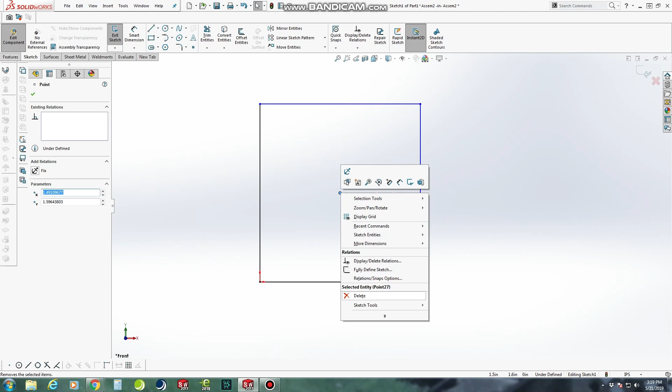Then we'll come in and do basic overall dimensions. Let's do 3 inches tall and 2 inches wide. I'm going with this 2 inches kind of arbitrarily because we have Delrin that we use that is 2 inches by 2 inches, which is basically just a high density plastic, and I think it'll be perfect for this.

Next we're going to put the circle that the rod's going to come through, and we want that to be in the middle. I think what I'll do is add my own construction line horizontal to this, and we can change that size. There we go.

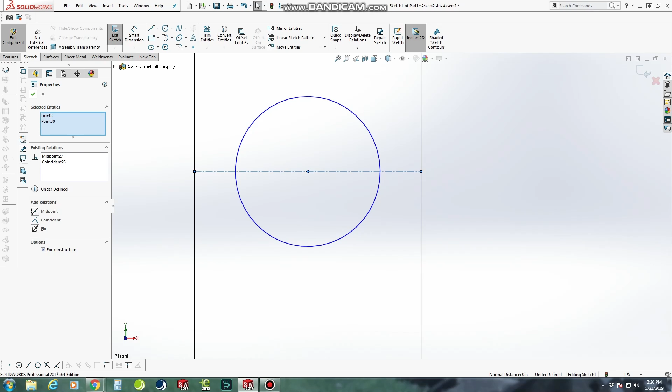And then we're going to hold control and click those and make that a midpoint line. And then let's add a height to that, let's do 1 inch, I think. And then we'll add a dimension to this, 0.625, that's the same size rod that they actually use on the Amazon one.

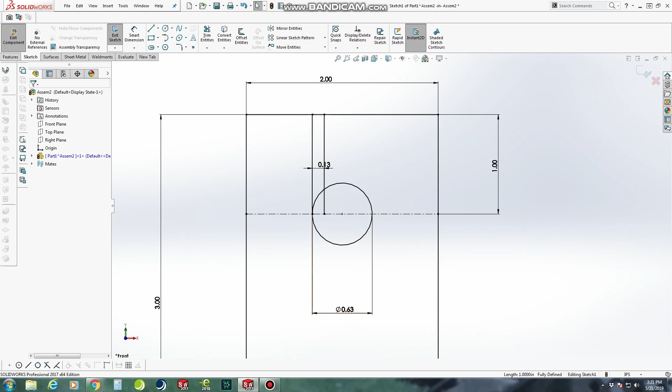Now here, this is where I want to start my changes. I want to add a slot, because the 1/8 is already set, that's perfect. I don't like how the set screw just comes from the middle and binds against the rod. I want an actual clamping action here. So this 0.125 here actually represents the kerf cut, the width of the saw blade we're going to be cutting this with. I think I'm just going to cut it on a bandsaw.

It's going to be the easiest way to do this. And so whenever we actually put our rod through, there's going to be a bolt that comes through perpendicular this way that'll actually clamp against the rod, and it'll be a much more elegant way to do that than just a set screw.

Alright, on the bottom here, I want to add some notches because I'm going to have a hot shoe. I'm going to make this a hot shoe mount just to make it a little bit easier for me to clamp and unclamp. I won't actually have to screw it to my hot shoe mount, it'll have its own.

And that hot shoe mount, I believe, is a 60-degree angle here. This is measured, and this is 0.375 deep. And then from here to here, I know my overall width is 1.7 inches, so we're going to divide that by 2. Alright, and there we have half of the hot shoe.

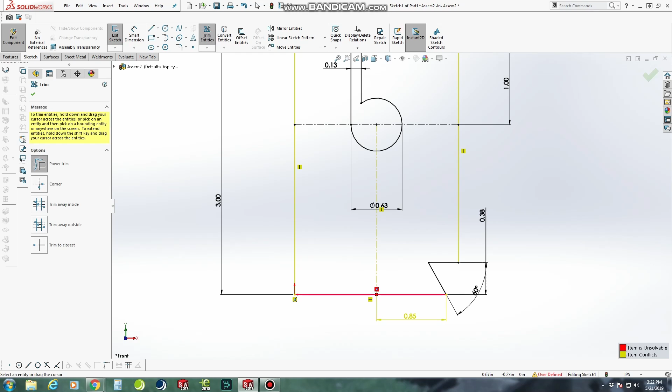Okay, it's angry because it thinks this should be a midpoint, but it shouldn't be. So let's delete that.

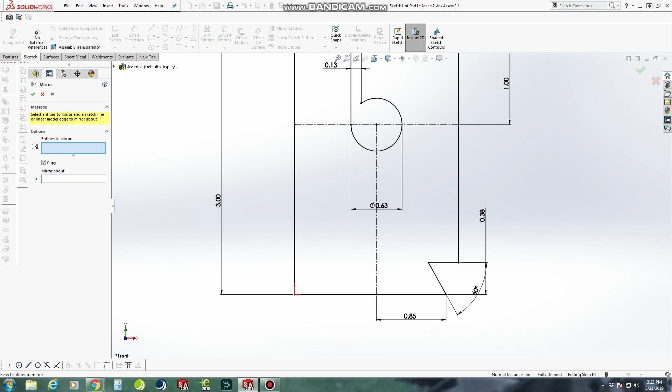Come on, you. In fact, let's just control and make that coincident. There we go, that is better. So now we're going to use this line just to mirror these two entities. Come on, there we go.

And then we'll trim these, and you'll notice the sketch is going to go undefined. That's okay. Everything is properly dimensioned, so we can just control-click origin, and we'll make that coincide. And there we have it. SolidWorks is very particular about those kinds of things.

Most of the fixes are very simple, but you do have to know them. One of the reasons that I absolutely hate SolidWorks.

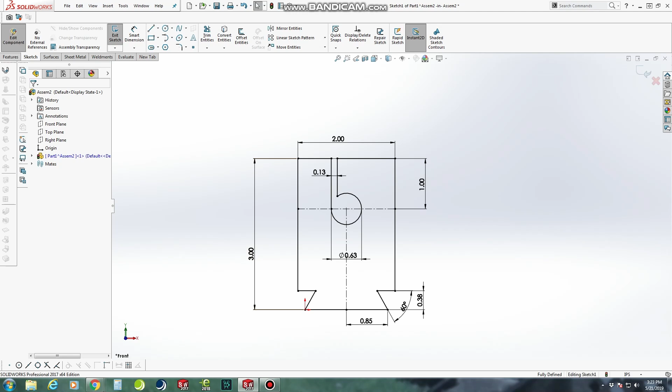Okay, so I think that this will do for our cross section. Let's go ahead and extrude that, and we'll extrude it into a 2-inch piece. That looks very good.

Let's go ahead and also call out a material on this. I think that I have, yep, Delrin. And we're going to be using a black Delrin.

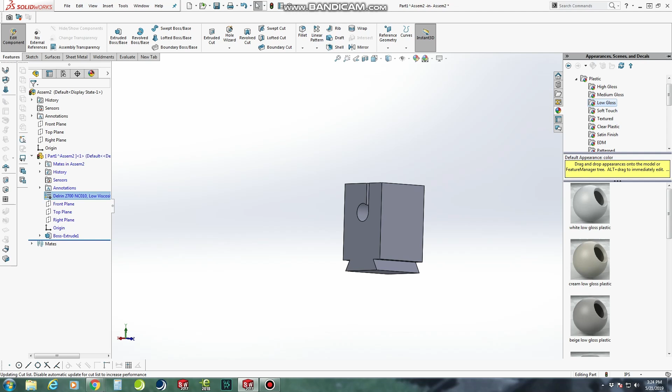Is it a low gloss? I would think it would be a low gloss. We're using black, but let's go with dark gray because I find that dark gray actually looks better in SolidWorks. It gives it a little bit more definition. Okay, so that's looking very good.

Let's go ahead and turn to this face here, and let's not start a sketch. We'll actually start a feature of an extruded cut here. Alright, so we're automatically in a sketch.

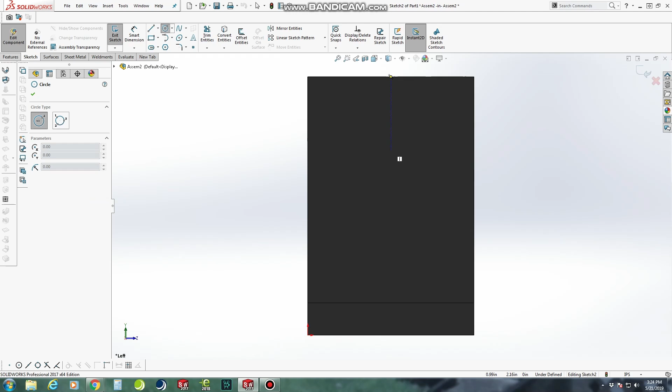Let's start off center here. Actually, let's kind of go off center just in a crazy place. And let's add a line all the way across. Convert that to construction.

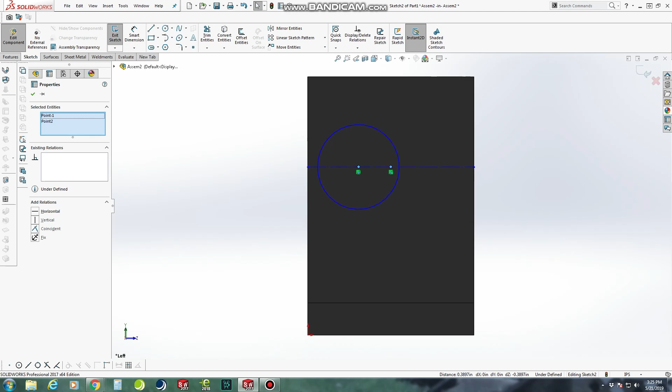Find the midpoint of this line and the center of this circle. Hold down control whenever clicking. And there we have it.

Okay, this diameter is going to be 0.20 because, yeah, because we will end up tapping this later. Okay.

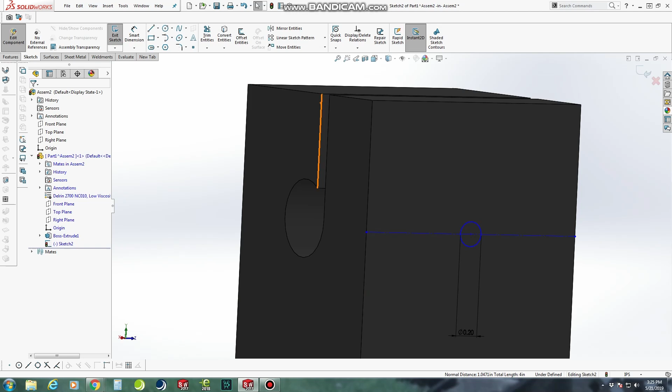And now we need to know where to bring this up to. So I wonder if SolidWorks will allow me to do this crazy maneuver. There should be a midpoint on this line. There it is. Okay, and this point here, we can make them coincide.

That's perfect. So now we know that this hole is going to go through the exact middle of this section, which is actually a little bit lower than I want. But I still think it'll work out really well. So, you know, no harm, no foul. We're not building a rocket ship. We're barely building a Timex.

And so let's complete this hot shoe mount now. Let's put a construction line down the middle. This will be the mirror. And let's draw a little triangle.

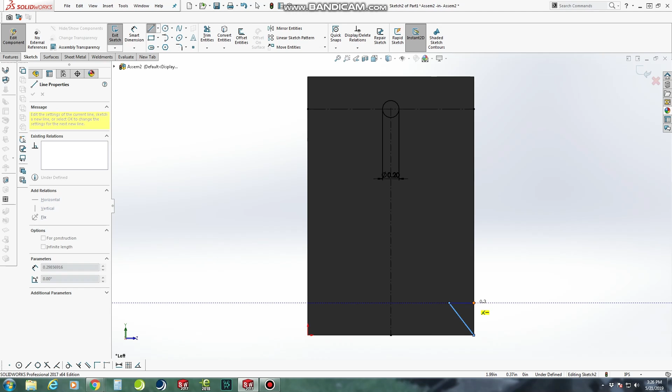And you'll notice that this line is fully defined, this line is defined this way. So all we need to do here is add that angle, which is 45 degrees. And there we have a fully defined sketch.

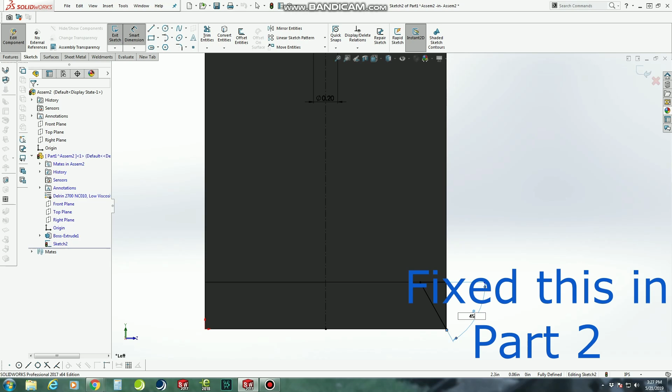Something doesn't seem right about it though, does it? 50 looks much better. I may have to go back and look and see what happened there.

Okay, let's go ahead and mirror. Sometimes I like to do my mirror about first. I wish it would default to that actually, because then I can watch things happen. Okay.

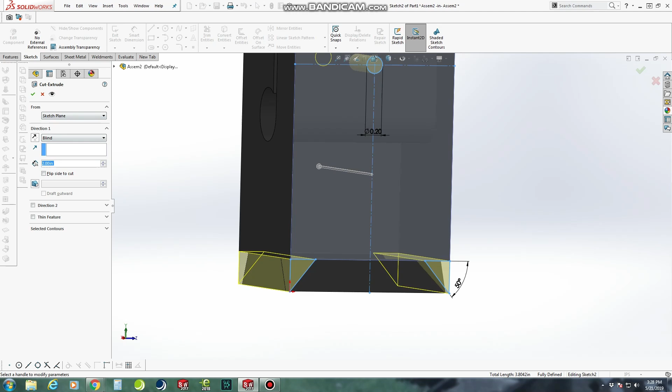And let's exit sketch. It'll bring us automatically into our cut extrude feature. We can stay blind at 2-inch, but I think I want to do through all. And that's very nice - that is a little hot shoe mount here.

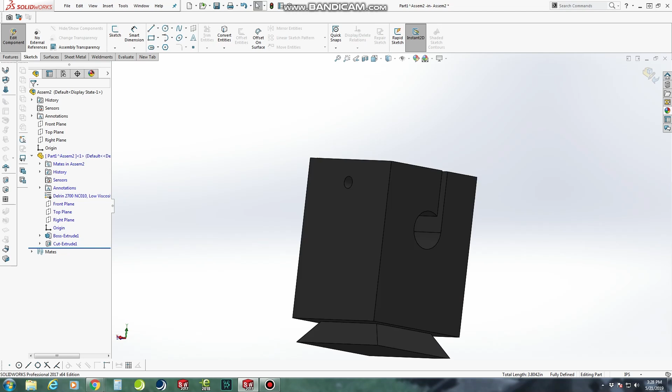This hole on this side anyways will be drilled and tapped. And we'll come back and actually do another cut extrude and open this one up. So let's do that.

Same thing, let's click on this face, cut extrude. We'll open this one up and let's dimension this one to just slightly above a 1/4 inch.

Let's do 9/32, which is .2812. .2812, a little moment there.

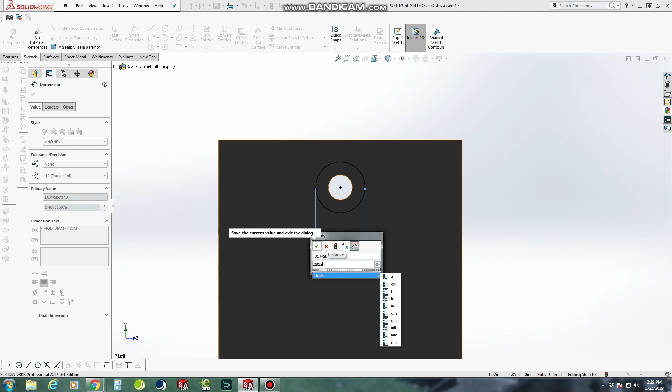And let's exit sketch, cut extrude, and this time we're going to do up to next. Okay, so we can see in the preview that that's only going to go through this one section.

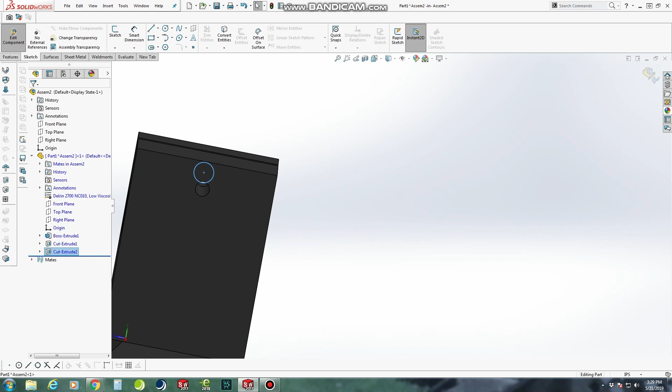And now let's go to features, and we'll add a thread to this hole. I think right now we're just going to make this a thread. 1/4-20, where's my 1/4-20 at? Perfect.

I'm not sure what this measurement is. Let's just add a little until we get to where we want to be at about.

Okay, now we also want to offset, and we want to reverse offset. This is one thing I don't like about SolidWorks, is why it automatically offsets into the hole.

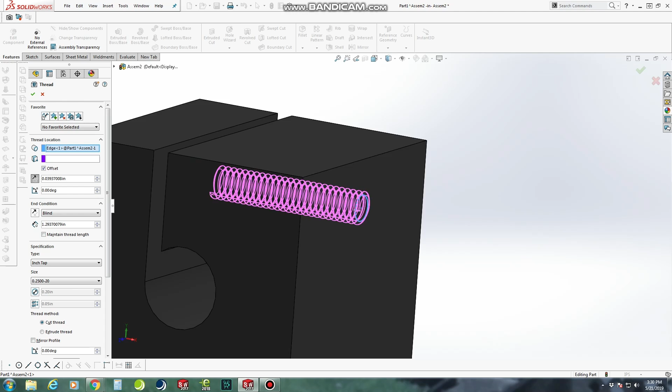Okay, let's just double check and make sure that the thread is going to stick out. Let's go to 0.04, a little bit cleaner number, and make sure that we're not going to bite into that. That looks great.

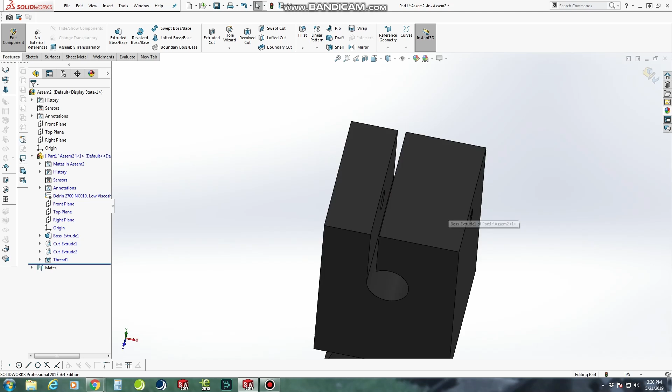Okay, let's add some fillets here. I think we can just add, no, we can't add to the face because I don't want it to add that way. See, that's why I don't want to do the face.

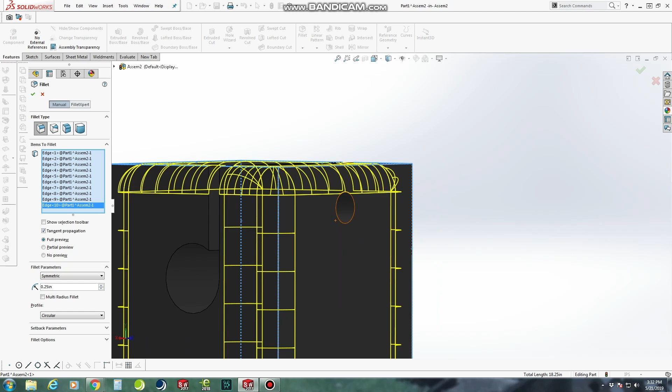This is going to be a 1/4 inch because we're going to do it with a router bit. It looks like it's going to be really close, but that's actually not going to matter. It does eat into that a little tiny bit, but I think that that'll be okay also.

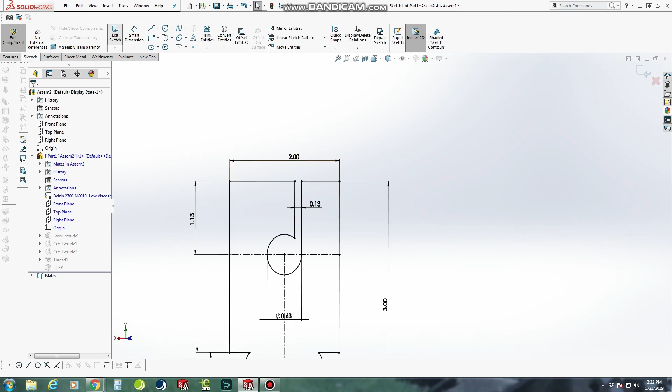And actually, you know what we can do to fix this? Let's go back into our initial sketch and let's make this 1.125. That should fix all of that. Exit sketch. Yeah, that looks much better.

We're going to add a little drilled and tapped hole here to put our midpoint at. There it is. Just in case we ever want to mount it to, say, something standard that's not a hot shoe, this will be the easiest way to do that, is to just drill and tap a little hole here.

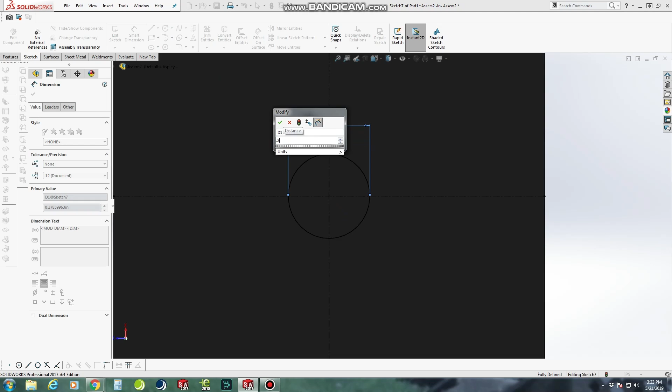Control and coincident. Smart dimension this as 0.20. Perfect. And exit sketch. We don't want to go that deep, although we could just go all the way through. Let's just make this 0.75, should be plenty of depth. And let's add some threads.

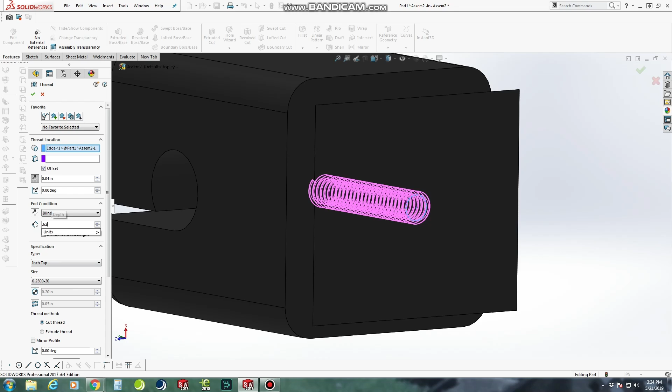Offset, flip offset, and let's just make this 0.625. That looks perfect. So let's go into, let's put this in matte stuff, camera boom.

I've already got a little folder made for it. And then we'll call this camera boom assembly. Perfect.

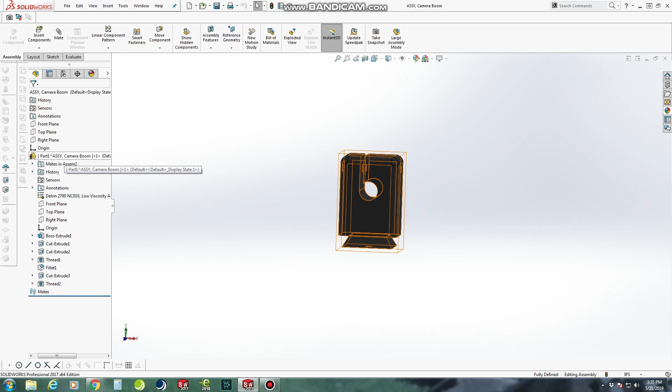Okay, and we'll name this, rename this part as... I always type stuff backwards for some reason. And let's go ahead and save all this. Save it. We'll save it internally, just to keep it a little bit simpler. We should never have to take this part and move it somewhere else.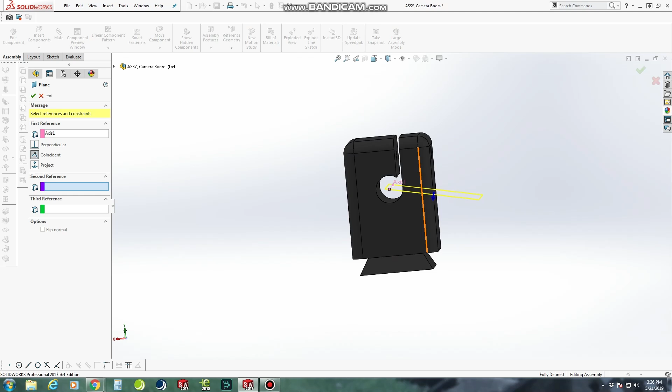I think we will need to create an axis on a cylindrical face. Perfect. And let's create a plane. What I should have done, honestly, guys, is to make my origin the middle of this hole, but, you know, didn't do it. And let's make it parallel to the top plane. That's perfect. I like that a lot.

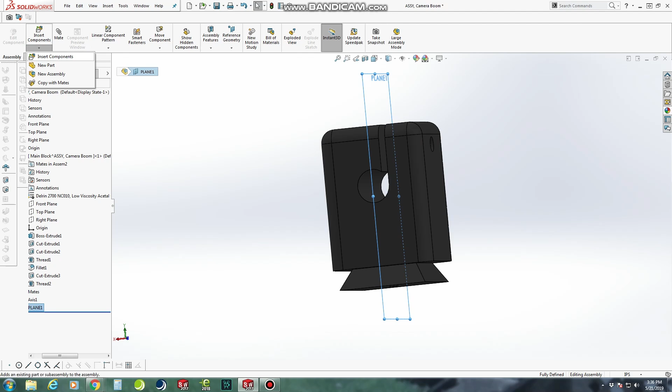Okay, so now we'll insert a new part on a plane 1. Have to edit this component. Where did my tree go for plane? Where's my plane 1? There it is. Sketch.

And we're just gonna start with a line. And we're gonna make that line, I don't know, guys, what do you think a good boom length would be? 30 inches? Let's see what the other one is. 33. Okay.

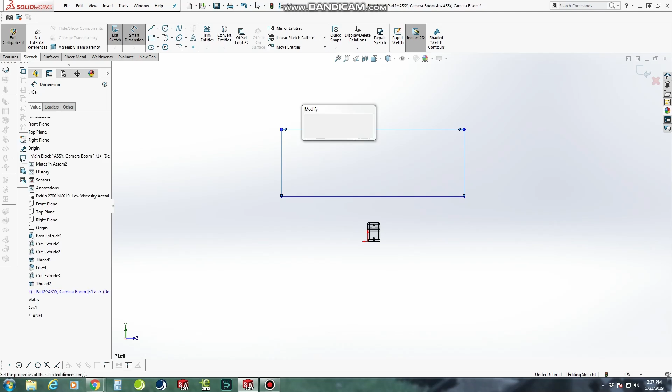Yeah, so let's do 30. Nah, let's stick with 30. I think 30 will be plenty long enough. Okay.

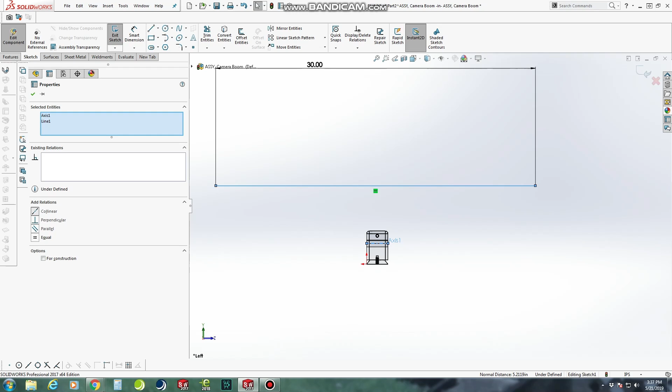And now, it kind of moved it out of where we want it to, but I think we can make it collinear with that axis, so that's perfect. I don't want to define it any further than this, because now what I want to do...

What's your problem now? Let's add a material.

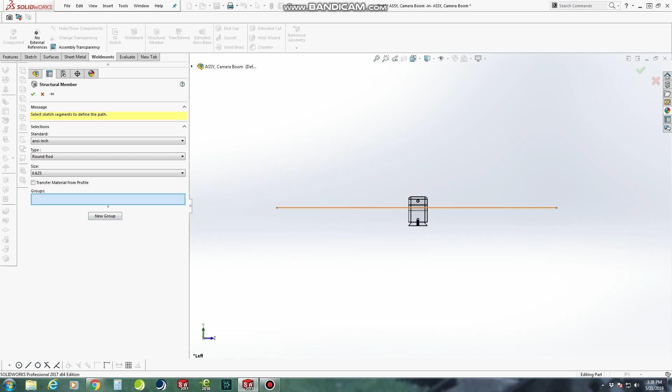Oh, yeah. Let's highlight this sketch, add structural member. I should have some round rod in here. And let's see if I have 5/8. Yes, I do. And this is going to be our only group. And that is perfect.

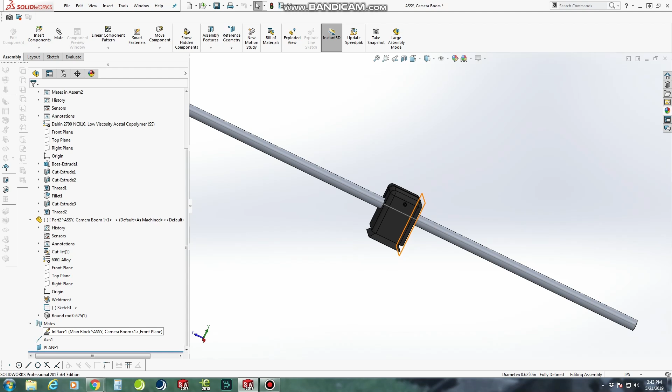Alright, so I think what we want to do now here is actually go to mates. And you can see this in place mate. Actually, you know what? Let's not do that, because that's that main block being fixed in place.

Let's go here. And part 2 is not fixed. There we go. So you can see how this kind of floats out in the middle of nowhere, wherever we want to put it at.

And let's go ahead and mate this. And let's not, we could do a concentric mate, but I think what I'd like to do is actually mate this axis with this sketch line. It will work a lot cleaner that way.

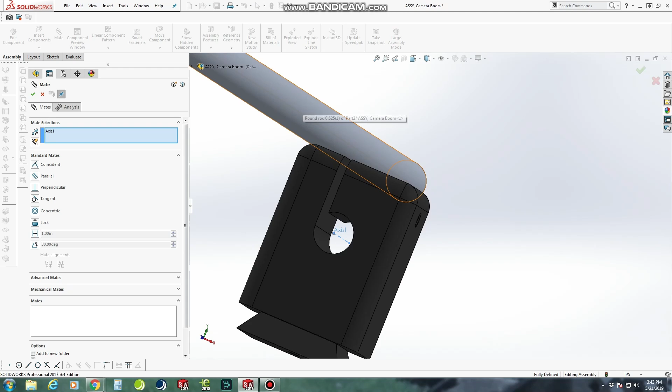So let's make sure that that axis is showing. Or actually we can just select this axis, select mate, and select this sketch. And it'll automatically be coincident, and that's perfect.

Alright, so now we can grab this and we can slide it in and out. Very nice. I like it. Alright, so that's all we're going to do for mate right now.

I want to get in here. Let's get back into this sketch and see if we can fully define where this is going to go.

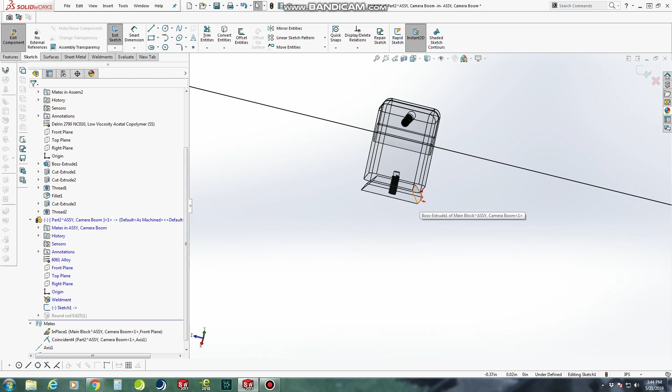It should allow us to just dimension it here. Actually, we should be able to find its own origin. Click the origin, and they should be vertical from each other. Yeah, okay, so that's good. That's fully defined. That should be what we were looking for.

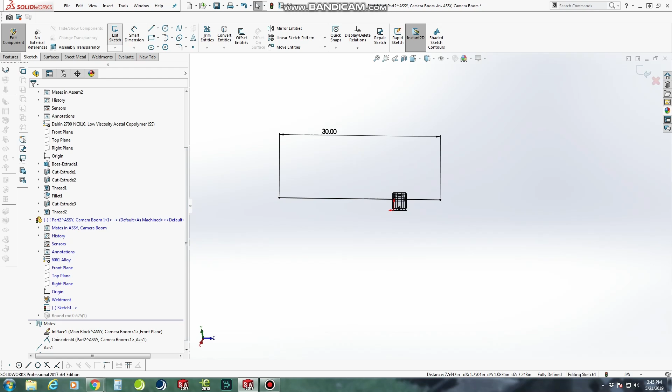Let's exit that sketch. Now another thing that I want to do differently that I didn't like on the model that we can buy. We'll need the top plane for this, and we'll make that later.

Is that I really want normal to, so we're actually looking at something. I want to be able to pivot my camera. And it's very hard to, it's impossible to do that with that other model.

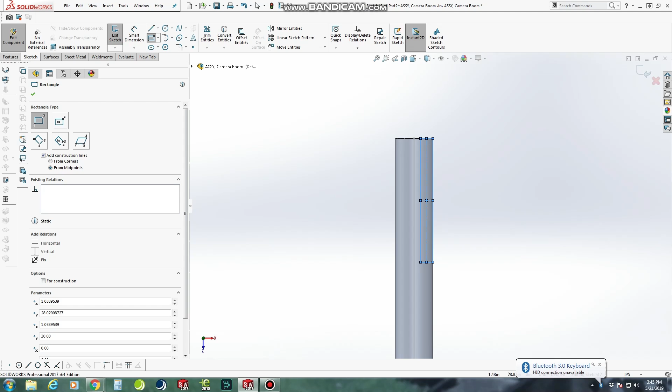So what I'm thinking we'll do here is actually cut a little notch out of this, and then we'll drill and tap another hole here. That actually is not going to work on that plane.

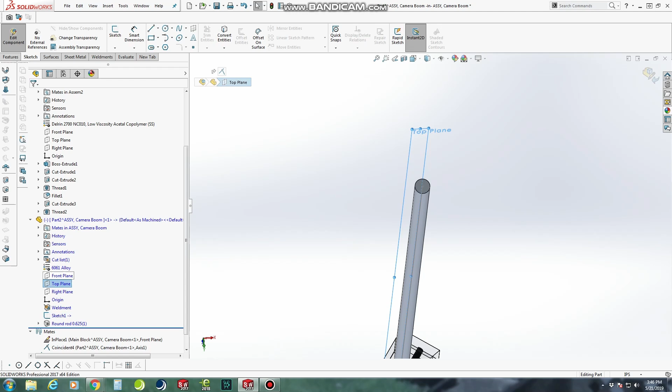Let's delete that sketch. We should have a plane that is directly, that'll work. The front plane will work. Although we could just do this also.

So on this face, we're going to do an extruded cut. Could also do convert entities, but I like this better. And we'll trim this side off. We'll make those equal.

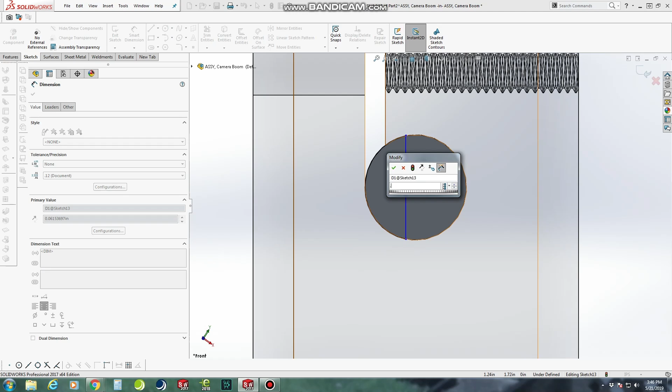And let's put this a 1/16 away from there, and let's also, I think I have to make it vertical. That's good enough. Alright, and let's extrude that. 1.5 inches should be plenty.

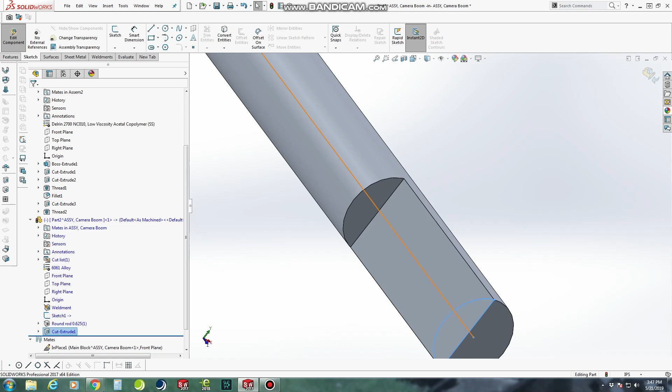Alright, so now we have a nice flat face here. But what I want to do here is not open a sketch. Features. On this plane.

And we'll go with another 1/4 here. So, 0.25. And we have 1.5 inches there, but I think we'll just go a 1/2 inch to give us, you know, roughly 1 inch. Well, exactly 1 inch from here to here, which should be plenty.

Now let's exit sketch. And we'll go up to next. Perfect.

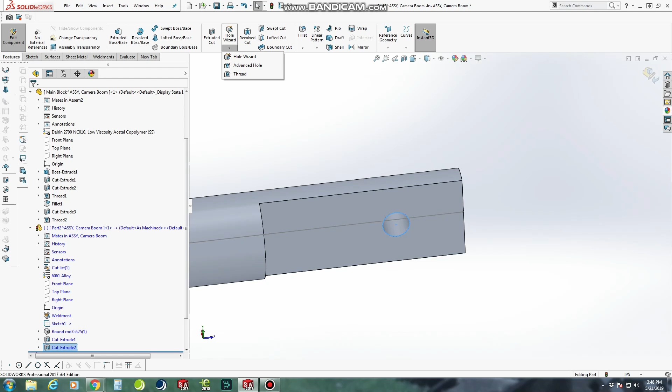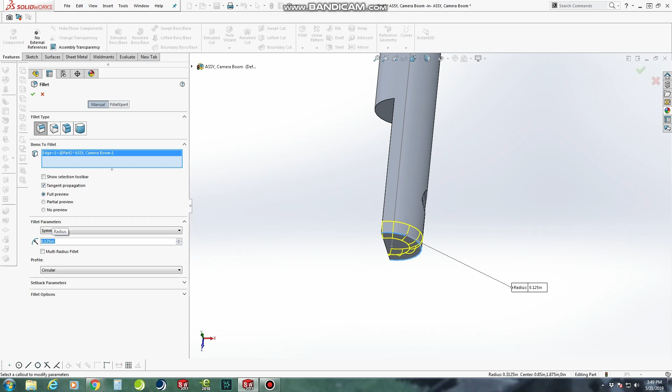And we'll add another thread. Plenty good. And let's add a little fillet here. Smaller than that. Much better, I think that is going to be a nice look.

Alright, so my idea is that on this flat face, what we'll have is a piece of angle, if we look at it from the top, that's going to come out and over this way, and then the camera is actually going to mount on the part that's right here, and then that will allow this face to grip and clamp that part to where it can't pivot whenever I tighten it down, but will allow it to pivot to level off.

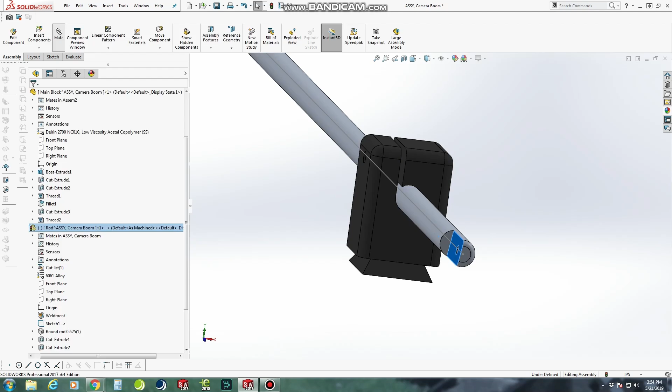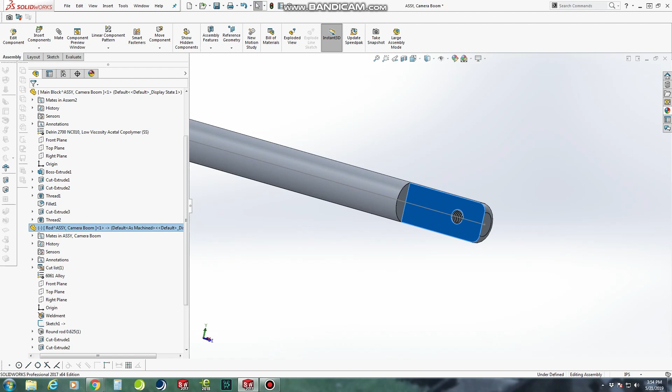What I'd like to do now, and it's actually not going to be practical whenever it's actually built, is to actually mate these two faces as parallel, just to make things a little simpler in the assembly. Of course, in real life we'll be able to spin it around, but in this form, in SolidWorks right now, this is going to be a little bit more convenient for me. Sorry if you're getting seasick from all the motion.

I'll tell you what, I think I'm going to create a plane that is coincident with this face. Because whenever I add my angle, which is going to be a new part on plane 2, let's make sure that we're in.

I don't know why, but it seems like it used to always click right into editing and let me go start editing. Let's start a sketch on plane 2. And all we're going to need here is a line.

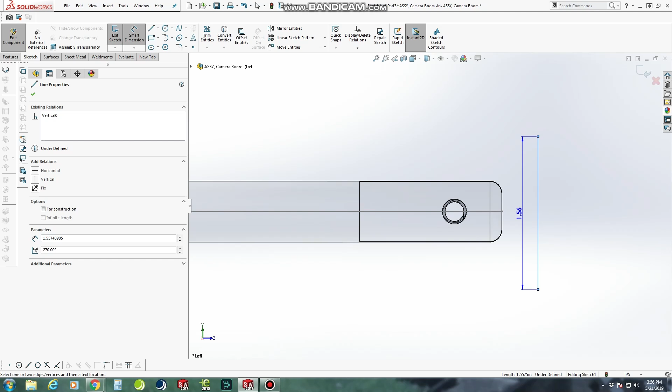And let's make that, hang on, let me measure this hot shoe real quick and see kind of what it uses to mount the camera. 2 1/4 by 3 inch. So let's make this 2.25.

And it's not very happy about that now, is it? So let's try to define that a little better. Wherever the origin is for you. It's not going to be happy, but we'll move it around later.

Weldments. Wait a minute, always exit sketch. Then go into your weldments. Structural member. Angle iron.

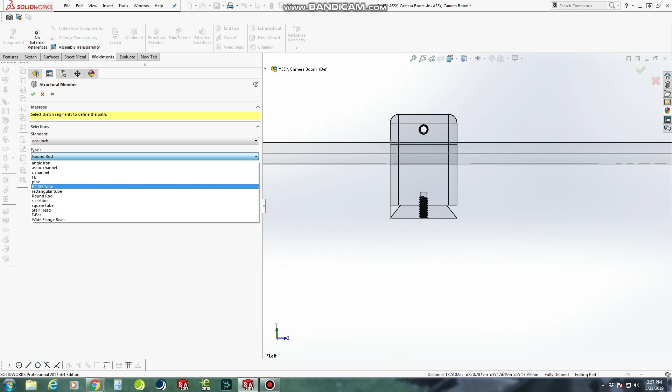I'm probably gonna have 2 by 2 by 3/16 in stock. So it's gonna be, that's why I'm gonna choose that one. And let's just check and see where we're at. I do like that.

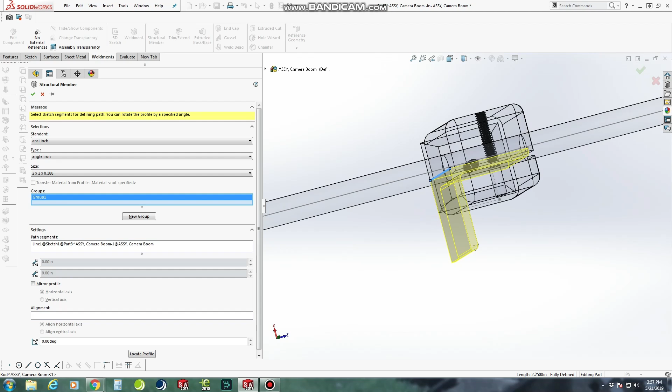Let's add material, 6061 aluminum. Just about all of our extrusions are 6061 aluminum. Alright, let's get out of this component for a minute.

As you can see here, it won't let me move it. So we can float it. And there we go, now we can do something with it. And let's mate these two faces before we go any further.

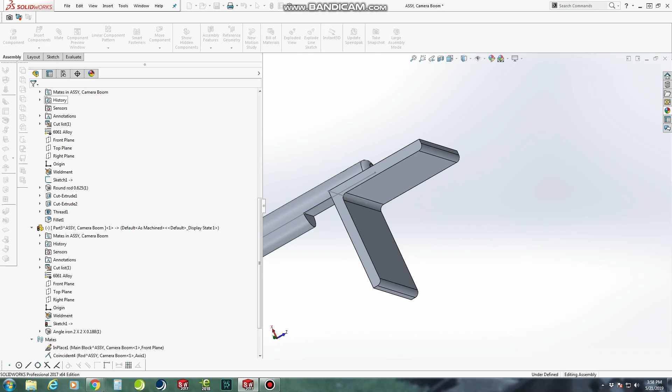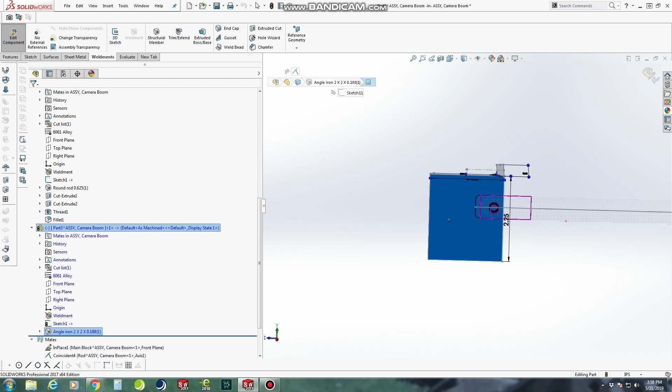Okay, now, what we want to do is add a hole here. So let's come right here and first of all, let's edit this component. Click on this face. Once again, extruded cut. Circle.

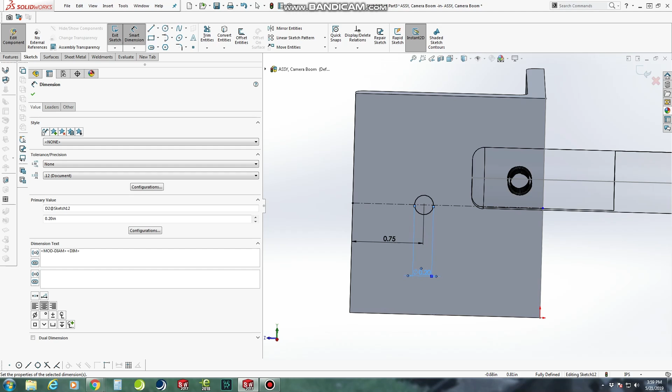And we'll just make it coincide with that. We won't make it actually the midpoint like we've been kind of having a habit of doing. Let's make this... no, I don't like that. I want to go a little bit more. It's still kind of low. Very nice. Actually, no, this one needs to be .2812.

Okay. And we'll just do up to next. Perfect.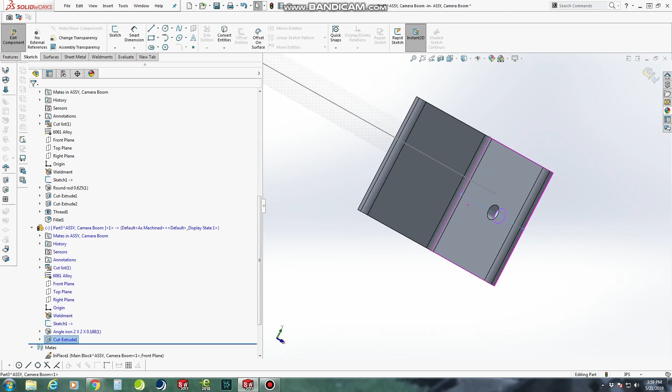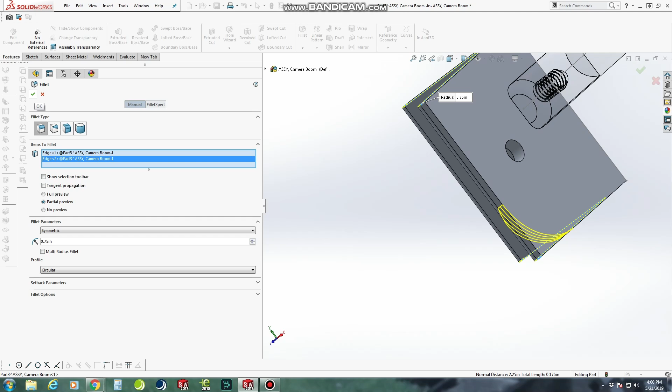Let's add some fillets here. And I don't want it to be a fillet like that. I want to turn off tangent propagation. And we can see that it's actually adding a nice little round there, and we want to make that. Let's see what 0.75 looks like. Doesn't seem to like it. Let's see what it does. Oh, that's good.

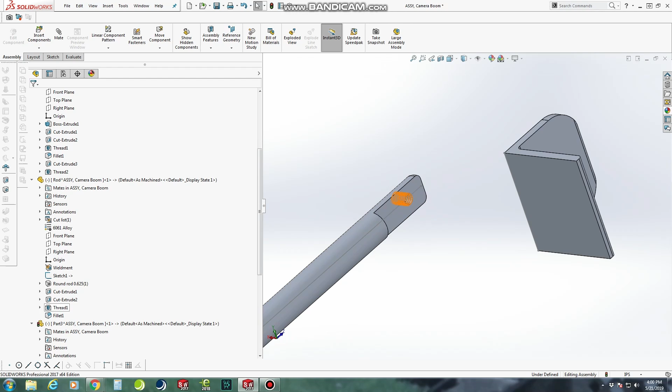Okay, now let's go ahead and get out of this component. And let's do something that I should have done before. Let's go into our rod and our cut extrude, and we want to show this little sketch here, because we're going to use this in a mate.

And this mate, to be precise, is concentric. And now we should probably fix that rod in place. But now you can see that we can see how much we can tilt our camera angle. That looks very good.

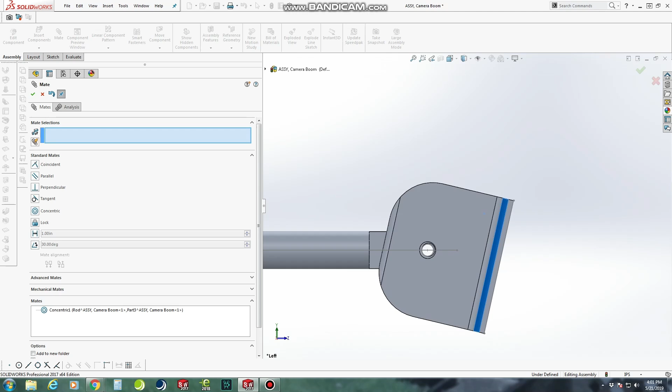I think that'll be plenty. If need be, we can go and make these fillets a little bit deeper. In fact, let's go ahead and do that.

Edit feature. And I know you're not happy right now. Can't be that. Let's do 0.875. Check. Why did you get very unhappy with me all of a sudden?

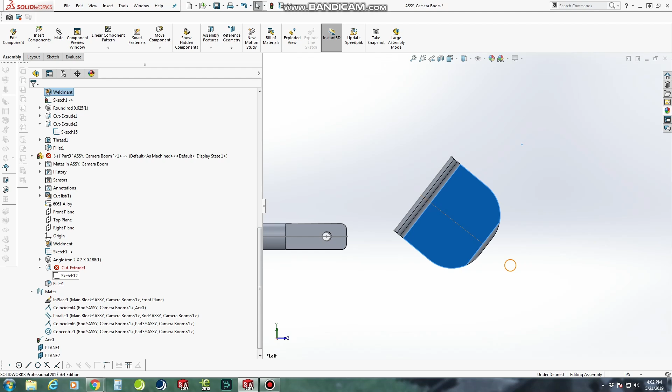Could not find face for feature. Oh, I see what happened. It wasn't very happy about that.

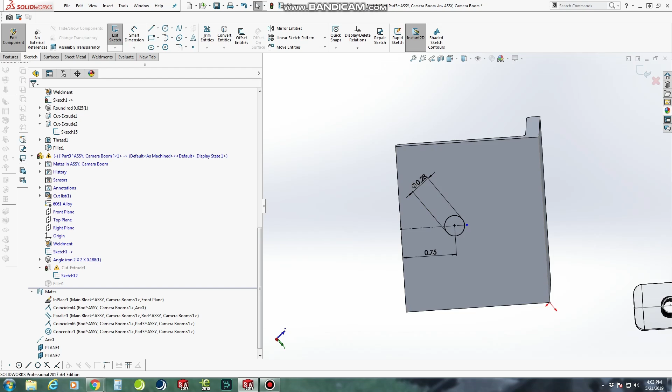Okay, so let's control and make those parallel. And let's delete this horizontal, because that's what it's attempting to keep happening. And let's flip that dimension. And then let's go ahead and make you and you. Let's merge those two. Excellent. And now we should be good. There we go. Much better.

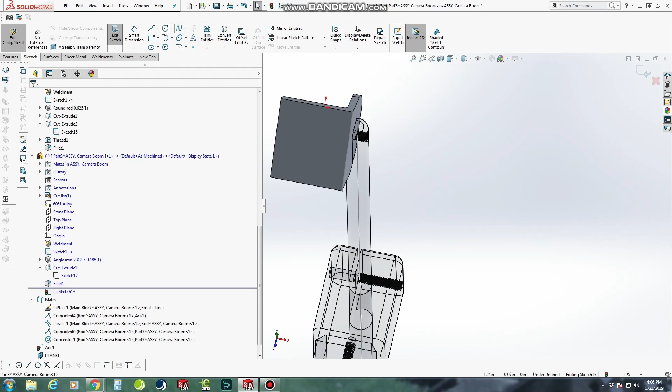Alright, so let's go ahead and add. Let's edit this component. And we'll add a hole here. Oh, hang on. You won't give me the normal 2 right now, will you? And this is going to be for the bolt for the camera.

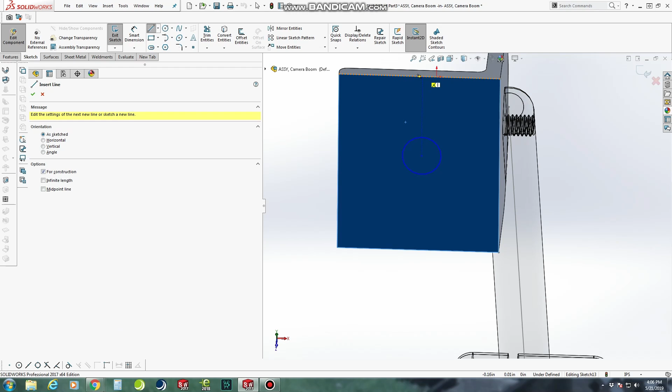Now, one thing I haven't really figured out yet, the way that how I would like to do this, is how am I going to make the bolt captive in this hole. I haven't figured it out exactly yet, but I'm sure it'll come to me.

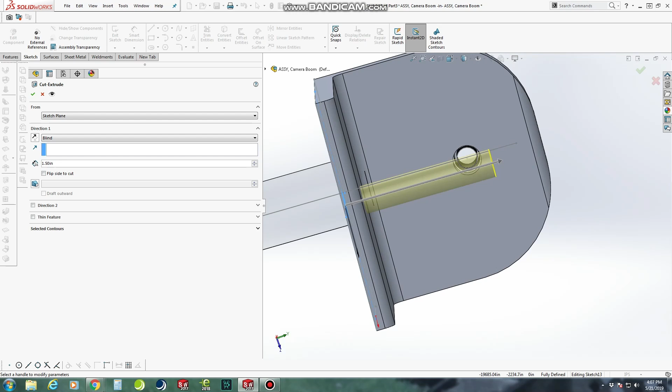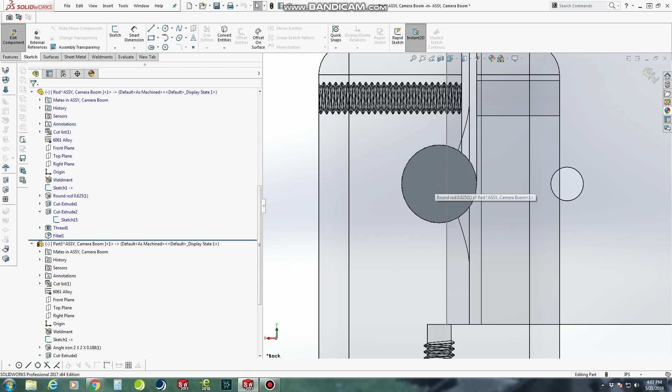So that is just about it. Oh, you know what? There is one more thing that I want to add. I am going to actually drill and tap the end of this rod. And I'm doing this because I want a way to hang counterweight off of here. And I think the easiest thing for me to do is to actually have a little bolt that sticks out a little bit that I can wrap a wire on with a weight or whatever works out best.

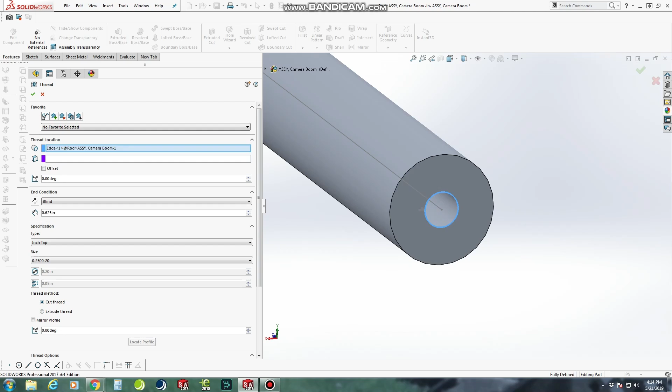Alright, let's go ahead and throw a thread right here. See, every time SolidWorks is going to make me do this. Why wouldn't you remember from last time what I wanted? There's a lot of pet peeves about SolidWorks that I have that it bugs me so much.

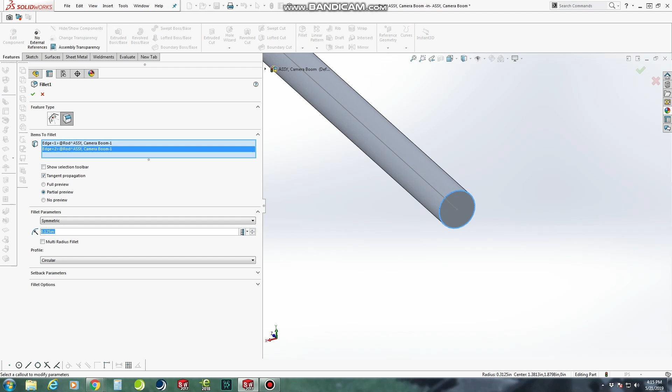Let's also go ahead and take this fillet and put it here. That'll work. Okay, edit.

Alright, so I'm not going to drop fasteners in here simply because it's not going to help me any to do it. Maybe I'll cover that another day. But this is pretty much going to be it. You know, this is the basic idea of what my overhead boom is going to look like.

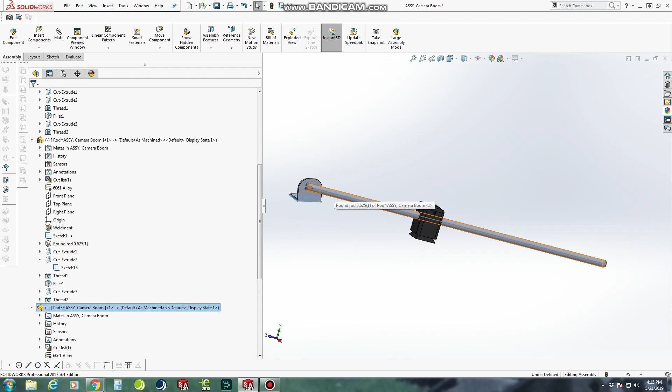So I think what I'll do is I'll have my material cut. I'm just going to have them cut my blanks out for me at the shop because it's easier for them to do it than for me to try to get it done by myself. So we'll have a piece of angle cut, a rod, and a little block of Delrin to work with.